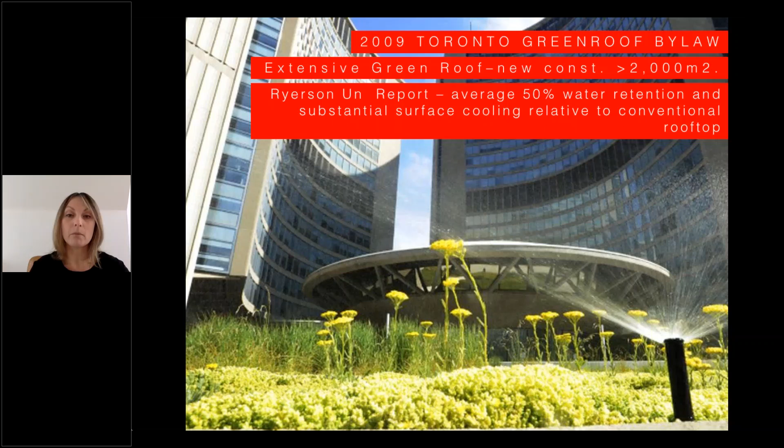And this was based on a Ryerson University report, which demonstrated that an average of 50% water retention and substantial surface cooling would be achieved relative to conventional rooftops. And that was a very monumental achievement for the City of Toronto. Fast forward 10 years, and the City of Toronto boasts over 700 green roofs and well over 5 million square feet of green roof installed.

Around the same time, my colleagues and I at the University of Toronto, a collaboration between the Architecture and Landscape faculty, engineering, biology, and most recently forestry, took on this project to set up an experimental lab to look at the evidence-based research and common industry practices relative to the construction guidelines that were published alongside the Green Roof Bylaw, and from what we learned are the common industry practices in and around Toronto.

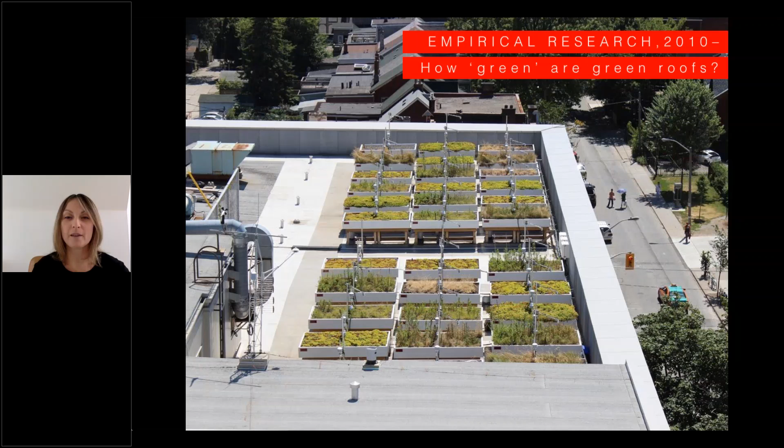And the main question that we asked is, how green are green roofs? How well are we doing in terms of the environmental performance that we ambition? And just for context, the Toronto Green Roof Construction Standard and the Toronto Green Roof Bylaw is part of a much larger suite of policies, strategies, and guidelines

in the Toronto region, which aim for an approach around cross-cutting environmental ambitions, an understanding that ecosystem services, co-benefits of living infrastructure exist at multiple dimensions of environmental management, at multiple scales, from urban forestry down to architectural scales and material scales, street level, and so on.

And that the ambitions that we have around stormwater management relative to reduction of flooding, the increase of biodiversity and species habitat, the reduction of pollution and increase or maintaining of air quality, reduction of urban heat are all interconnected, and that we have to really think about it as multiple systems that are occurring simultaneously and also in concert with one another, and thinking about the impacts regionally and locally.

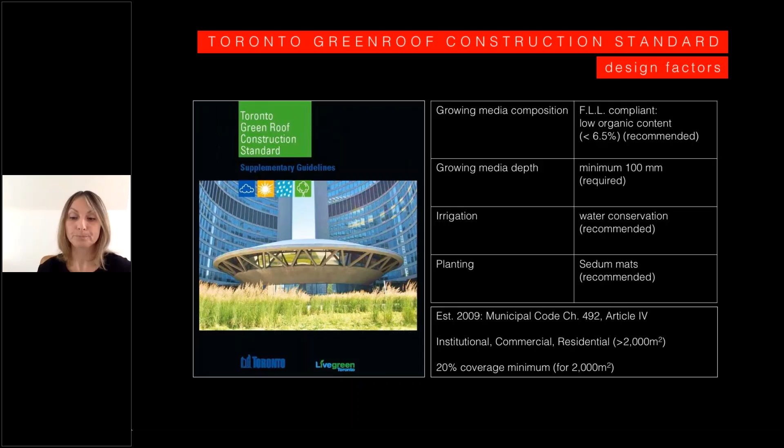So this is an image of our testing lab. On one of our testing labs, we now have two, looking at 33 test beds that examine extensive green roofs between 10 and 15 centimeters. And we're looking at stormwater management. In other words, what is the capacity of the green roof to hold on to water and reduce discharge, or reduce runoff, and alleviate the pressure on urban water systems and flooding.

What's the thermoregulatory capacity of plants and green roofs via evapotranspiration, and also surface cooling relative to blacktop or conventional rooftops? What is the survival rate and plant cover percentage, as well as biodiversity? And what's the relationship of green roofs to pollinators? And as you saw before, there is an ambition for the City of Toronto to become a bee city or increase pollinator habitats. And the main question relative to the design parameters is, what are the most significant design parameters for any one of these performance criteria?

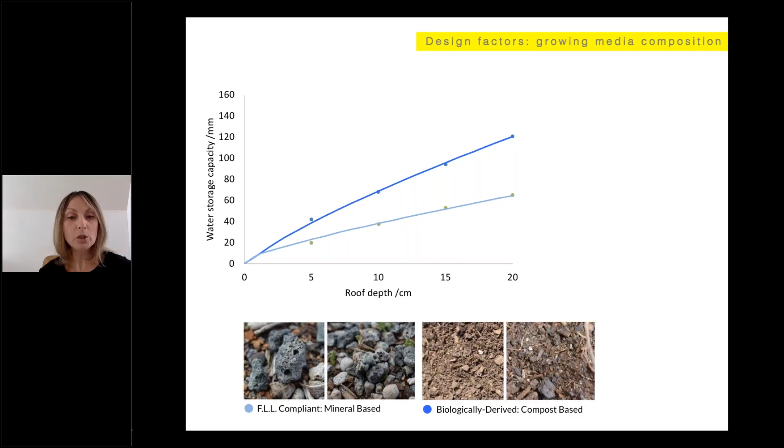What you could see from this graph, and this is just a lab test, looking at the water storage capacity of the FLL in the lighter blue and the biologically derived compost-based in the darker blue, is already showing from the get-go a much larger, higher water retention capacity.

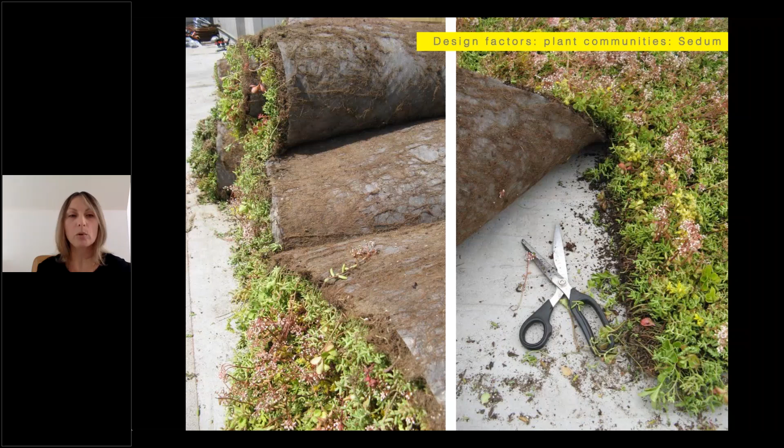The sedum comes in pre-grown mats in nurseries that are rolled and then installed pre-vegetated. One of the reasons that industry and builders like it is that you have a kind of instant landscape at ribbon cutting. One thing that's important to mention is that sedum and sedum cultivars are non-native to Southern Ontario. There are a few cultivars that are native to BC, but even those in the mix are not thriving. So this is something to keep in mind for later in the talk, when I'll talk about the importance of native versus non-native and the relationship to pollinators.

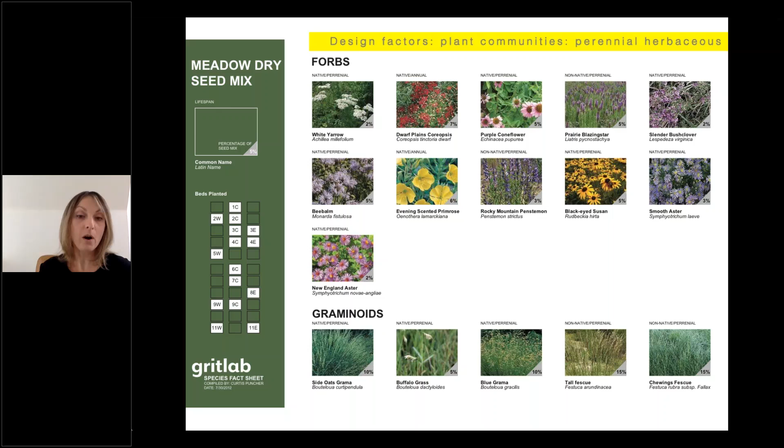The third variable is looking at irrigation treatments. The two common practices relative to irrigation are automated daily irrigation and no irrigation. With respect to no irrigation, one thing that's really important to note is that LEED and green building standards attribute points to non-irrigated landscapes, or at least non-irrigated with potable water. So that's one practice. The other is that green roofs are marketed largely as no-maintenance landscapes, which we'll get to in a bit in a discussion. And of course, there's a cost associated. So you will find many of the green roofs that are installed around Toronto with no irrigation.

The third is something that we took on with the question of what if we installed soil moisture sensor irrigation, insofar that when the soil is wet, the irrigation system would not turn on, and conversely, when the soil is dry, it would trigger the irrigation system, so on-demand irrigation. And what we found was that with the on-demand irrigation, we could achieve up to 50% water conservation, so that's quite significant.

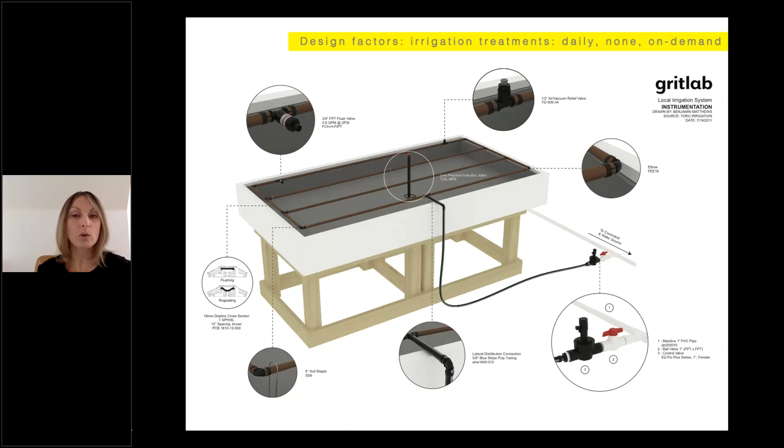So in summary, we've got a multifactorial experimental design, and this is really important to think about because we're talking about ecosystem services. We're looking at multiple performances that we're trying to achieve with a living system. And we're also looking at the fact that there are multiple design variables contributing in sometimes different and opposite ways towards an environmental performance. So here we're looking at, in the right column, the different alternatives. And the fourth element that I didn't address yet is the depth, where we're looking at 10 centimeters or 100 millimeters, which is the minimum requirement for the City of Toronto, and then we're also looking at 15 centimeters.

The question is, if we increase the depth, do we see a difference in the environmental performance? And here, what's really important in terms of depth is that obviously more soil is more cost. More soil or more growing media is more environmental impact. More depth and weight on the roof requires more load-bearing capacity. So again, when you're looking at the entire life cycle cost, the question is, if we increase the media depth, do the environmental benefits we're getting actually outweigh the environmental impact?

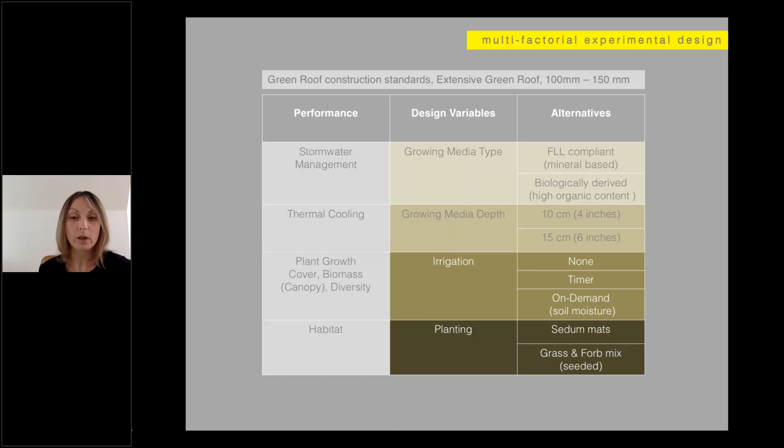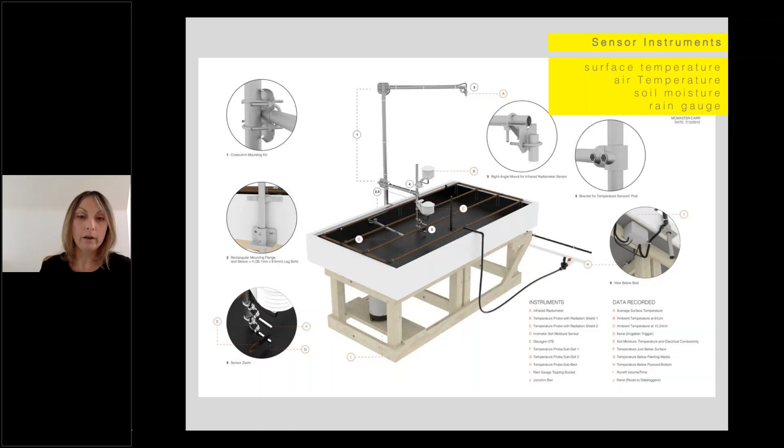All of our lab is instrumented with sensors. We're looking at sensors that are integrated into the bed: surface temperature, air temperature, soil moisture sensors, a rain gauge, which is at the bottom left of the rendering there, looking at water discharge from the bed. And each bed is then measured against a weather station that's recording the climate data on our roof.

So what have we found? As I said before, prevalent industry practices look at the mineral aggregate, the sedum, and either daily or no irrigation, at or less than 10 centimeters. And I'll get to that during our discussion when we're talking about the construction standards or supplementary guidelines from the City of Toronto.

And what we have found, in contrast, is that the organic medium was far superior relative to stormwater management or retention, water retention capacity, also for thermal cooling, and for the support of a much larger range of plants, not only sedum, but also the herbaceous vascular plants.

And of course, the on-demand irrigation proves to be a much better solution than the daily irrigation for water conservation, and a great compromise to sustain a broader biodiverse plant community and increase thermal cooling and reach that kind of balance between water conservation and environmental performance.

A little bit further in detail. So we know, from other studies and reports, that green roofs on average hold on to 50% of the water. And what you're looking at here is runoff coefficient. So percent retention is the reverse. So 0.4 would be 60%. What we found is actually better news. So 60% on average across all the different configurations. So that's really good news in terms of thinking about the viability and the benefits of green roofs.

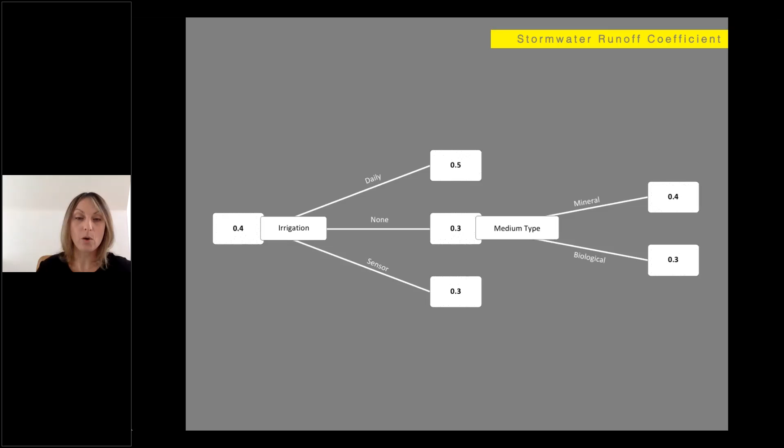And the second most significant factor is the medium type. So the growth media, when we use the mineral aggregate, again drops down to 60%, and with the biological media, we can maintain up to 70% of water retention, which is quite significant, especially if 50% is now kind of the going standard for calculation for engineering.

So in summary, organic media plays a significant role in increasing stormwater retention in modules that do not receive irrigation. Depth or choice of vegetation does not significantly influence the hydrological performance. And that is, I think, a really important message, and I'll discuss that a bit later when we talk about the FLL standards that are dictating a lot of the industry practice in Southern Ontario and in Toronto.

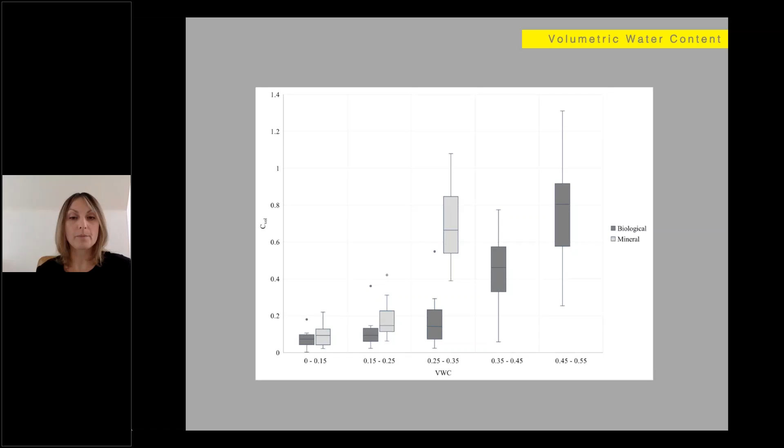What's interesting also about the organic media is that the volumetric water content is far superior between the biological and the mineral. And you can see the biological in the dark gray holds on to the water content at a much greater rate. And what's important to note here is that the organic media water retention capacity increases when pre-wet. And that's really important when we're talking about back-to-back storm events, when the soil is already wet.

The FLL will drain immediately. In contrast, the organic media will just continue to hold on to more water. The pre-wet condition could also be with prior irrigation the day before, and the soil is still wet. So another added bonus for this.

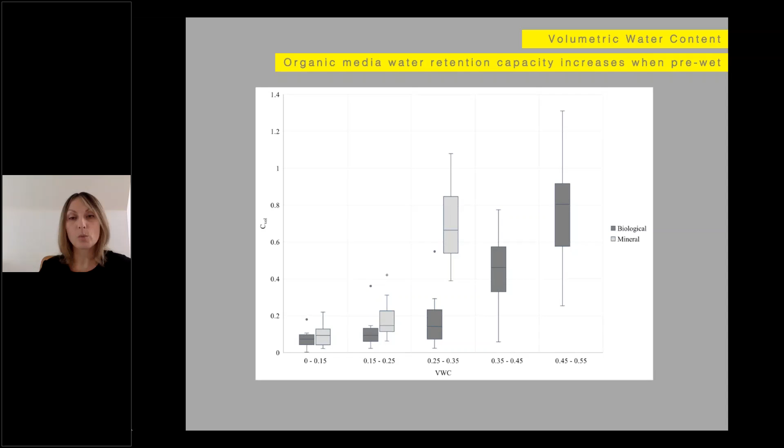And what's also important about this organic media is that the bulk density and the overall weight is much lighter than the FLL. So thinking about the life cycle costs and load bearing capacity, as well as retrofit of buildings that have a limitation in terms of the load bearing capacity, this would be a much better solution compared to the FLL.

This was another study that we ran, and what we found was that obviously, the bottom line is plants, growth media, and water are interrelated. You can't think about plants and water independently, which is one of the biggest challenges in green roof practice. What you can see here from this study is that there is a sharp decline of cover and survivability with what we're calling our meadow or our herbaceous plants when there's no irrigation. So irrigation is absolutely essential for non-sedum planting.

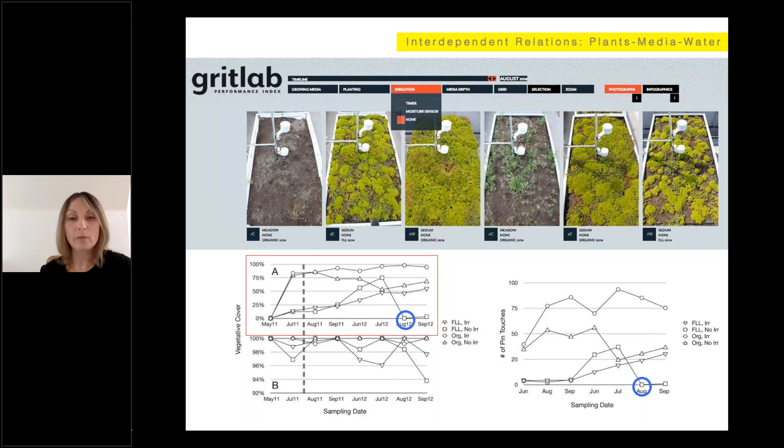The sedum maintains upwards of 90% of cover despite lack of irrigation and regardless of the growth media. However, what you can see here from some of the more patchy sedum beds, for instance, the one on the far right, is that when the sedum over time grows on top of FLL media with no irrigation, it will begin to become patchy and lose cover. And we found that over time.

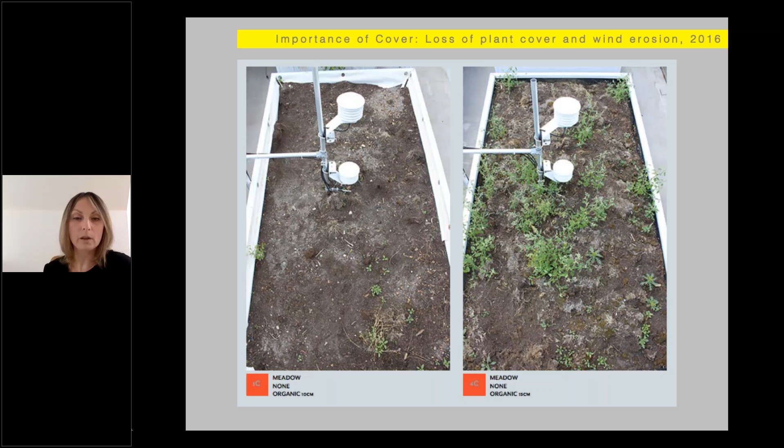And cover is really important. The result of lack of cover is basically scour, wind erosion. You can see how the growth media in the beds over time is lost due to the lack of roots and plants. And that correlates with thermal cooling.

But certainly the combination of sedum on top of organic is far superior, and especially when you're dealing with the herbaceous plants, the organic media and irrigation is essential. And what happens in terms of thermal cooling is that on average, we're looking at surface cooling. So above 6 inches above the beds, the thermal cooling is relatively negligible. It was comparable to what we were recording with the weather station, and this is because of wind.

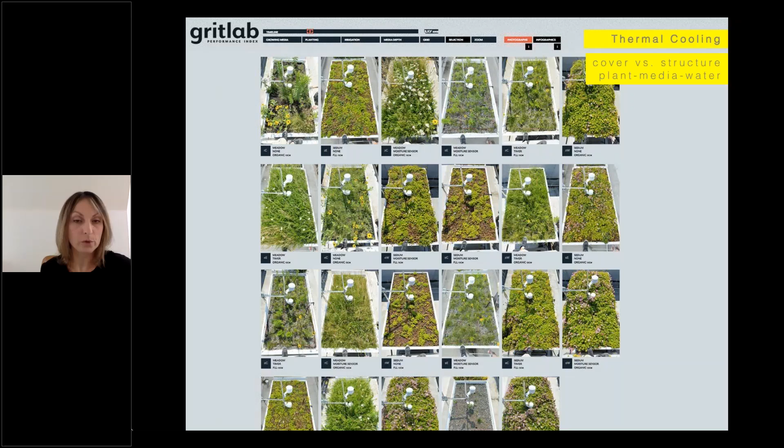Now, I want to talk about where we are in terms of industry practices relative to FLL guidelines, which are the primary guidelines that the City of Toronto references, and the City of Toronto is not the only one. There are many cities across North America that are looking at this FLL guideline, which is generated in Germany. Germany obviously has been a leader in green roofs for a long time. But I want to point out some inconsistencies and food for thought in terms of how we move forward with guidelines and thinking about green roofs, particularly in this region.

First, I think one really important misconception or inconsistency to point out is the difference between the definition of intensive green roofs and extensive green roofs. In Southern Ontario, the idea is that extensive is based on depth. It is 10 to 15 centimeter growth media and construction. And intensive is above that.

And FLL guidelines really talk about this idea of maintenance. So if you look at the text here, they're talking about a type of green roof that can be sustained through intensive care, especially regular water and nutrient supply. And so they're relating the limitations or restrictions around planting perennials, grasses, flower bulbs, summer flowers, and so on, to the idea that it's about maintenance, that it's about intensive care.

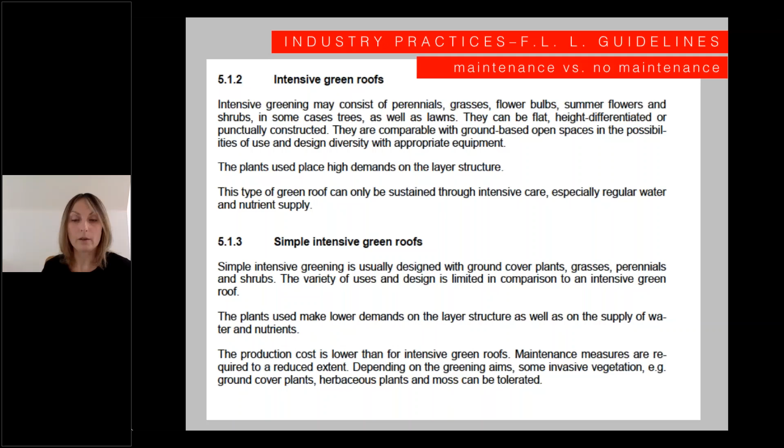In contrast, the idea about the extensive green roof is that it's self-sustaining, it's low maintenance or no maintenance. And you can see here the vegetation are mosses, succulents, and so there is an idea that irrigation is essentially an intensive practice.

And so this is something I want to bring out in terms of the question: should guidelines around green roofs be universal given different climate and eco-regional variations? We have different rainfall between Eastern Canada, Central Canada, and Western Canada. Certainly across North America. Would you compare Toronto to Texas or California or Colorado or Florida for that matter?

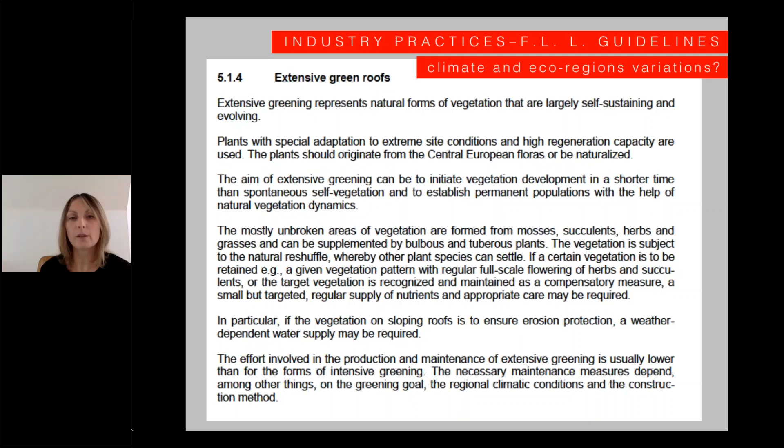How can we take guidelines that are thinking so restrictively, disregarding climate specificity with regards to rainfall, the growth media that's available regionally, and the flora that's available regionally?

The other thing that I want to point out is the linking of growth media depth to water retention. There are references in the FLL around this idea that the only way to increase the water retention capacity is to increase depth. And what I've shown you before is that by rethinking the composition and structure of the growth media, we can increase water retention capacity and nutrient availability to support a much wider variety of vascular plants without increasing the depth.

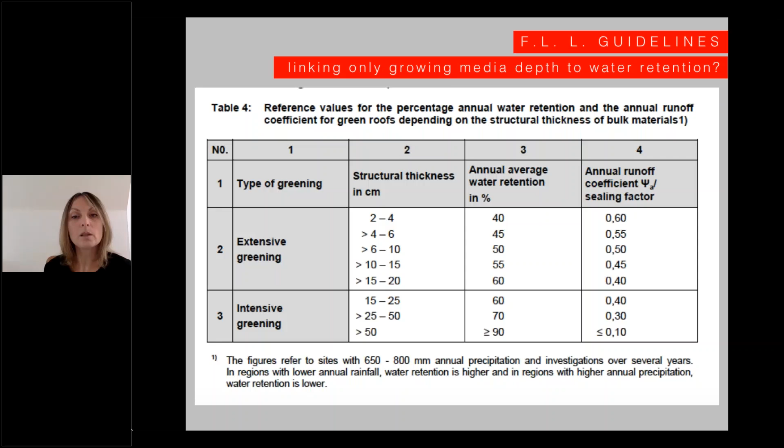And so here's another misconception, I think, about linking only growing media depth to plant selection. In other words, if you are thinking about a thinner construction, you're limited to sedum, and if you're thinking about the more herbaceous greening, you have to increase your depth. And I would argue that it's really about the material composition that we should be looking at, and also the notion of irrigation in concert.

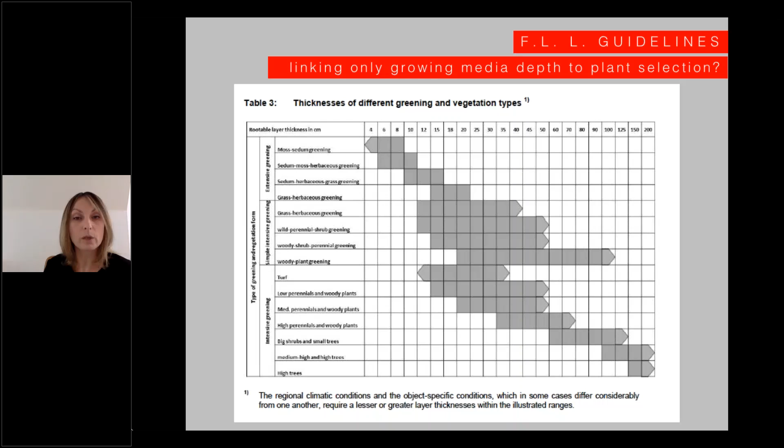Now, organics are vilified quite a bit. FLL is restrictive around organic input, particularly with this idea that in the first year of construction, organics would leach. There's also an ongoing myth around compaction and loss of organics. And what we found in a survey that we did of 20 roofs, some of which are 20 years old in Toronto, was that there was no compaction and loss of organics, and this is due to a natural process of pedogenesis, which is essentially the creation of soil due to the organic matter that is then added to the soil via the plants that are there.

So if you have the right combination and you've thought about what am I growing and what should it be growing in, and does it need water irrigation to maintain cover and full health, you've got an ongoing and healthy process of pedogenesis and soil creation and no loss of organics.

The other myth is about nutrient loading, the nitrogen and phosphorus, which would create eutrophication and algal blooms in our water systems. And we did a quick calculation. If all Toronto's rooftops were covered with organic green roofs, the output of nitrogen and phosphorus to Lake Ontario would be an infinitesimal fraction of the output that's coming out of the wastewater treatment plants. Likewise, we don't vilify fertilizers that are going into our park systems or gardens or any other landscape in the urban environment. So why are we so strict with the presence of organics in green roofs?

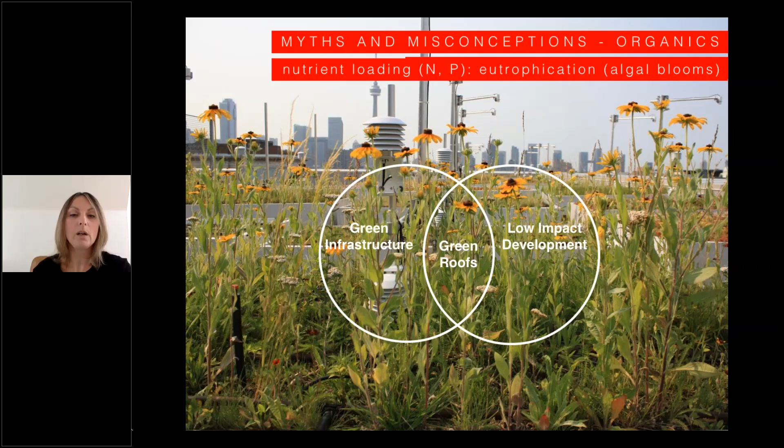And I would argue that part of the logic is that green roofs fall between green infrastructure or living infrastructure, which are these vegetative-based systems, and low impact development, which also includes cisterns and porous pavement that obviously don't output any nutrients into our water systems. And that's where the industry myth around these organics comes from.

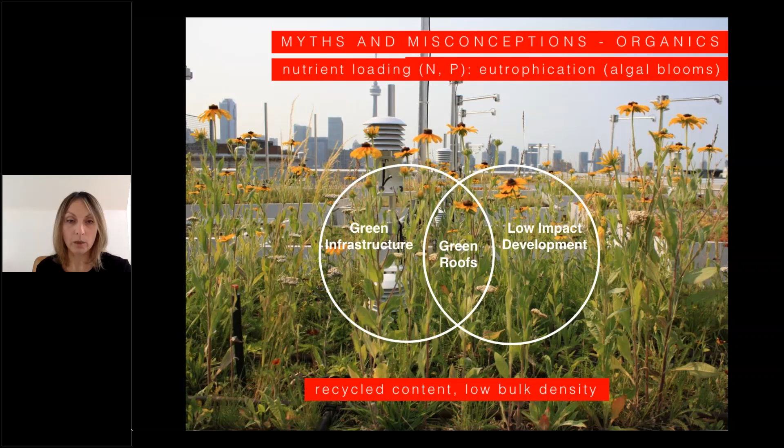And the other thing that I think is worth mentioning is the fact that with the organics, a large portion of them are recycled content. They're coming from waste streams from wood mills, for instance, pine bark, and so on. And as I mentioned before, they also have the low bulk density, and so are much more advantageous in terms of thinking about a full life cycle cost.

And then to sedum or not to sedum, obviously, is the question. This is the primary go-to for a lot of green roof construction, and there are certain studies that have come out trying to prove that herbaceous plants are not sustainable and cannot be grown on a shallow, extensive green roof. And of course, those studies looked at a growth media that was inappropriate to herbaceous plants. So, with every landscape, you're always thinking, what am I growing and what is the appropriate soil or growth media to support that plant?

And why is it important? So we ran a study, which was peer-review published, that looked at the relationship with pollinators and pollen loads relative to the sedum beds on our roof and the herbaceous plants. And what we found was that the native wild solitary bees were attracted primarily to the herbaceous plants. They also visited the sedum plants, but they went to the herbaceous plants as well. And the non-native species, the domesticated honeybee, a European species, gravitated primarily to the sedum.

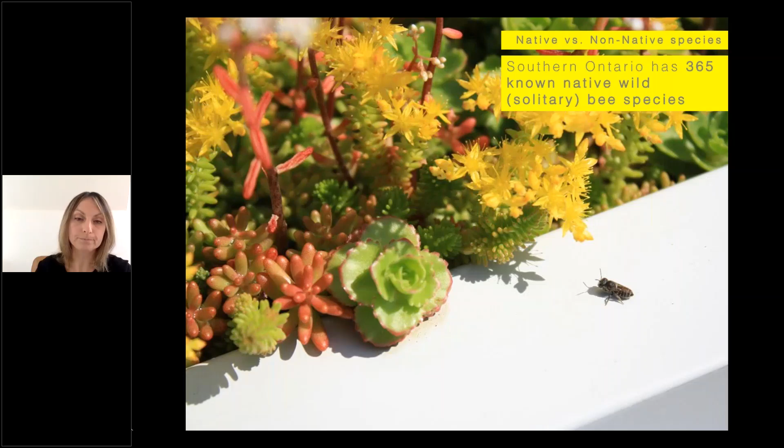More on pollinators, and this was a general study that we did looking at building elevation and green roofs. And does building elevation matter, given that a lot of the construction here in Toronto is 20 stories all the way up to 100 stories? And do pollinators actually visit rooftops that are at such elevation? And what we found was that above the 8th story, there is a sharp decline in bee visitation.

And so the conclusion there is designing for biodiversity at the 60th floor is not really purposeful. And we should think about the city as a 3-dimensional structure, looking at, for instance, the tower over the podium, where the podium is actually designed as a green roof for biodiversity for pollinator species with a much more biodiverse planting.

And the green roof that's installed at the 60th floor is perhaps a sedum mat just to maintain cover, or maybe we just put a white roof, because at that point the green roof is not really contributing much, and all we're looking for is just solar reflectance.

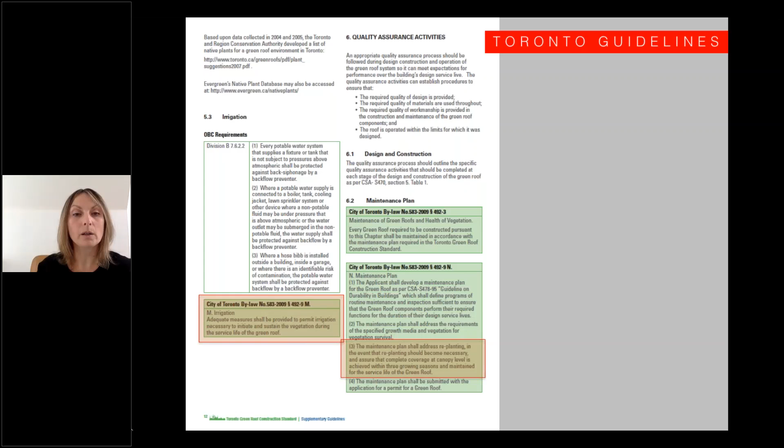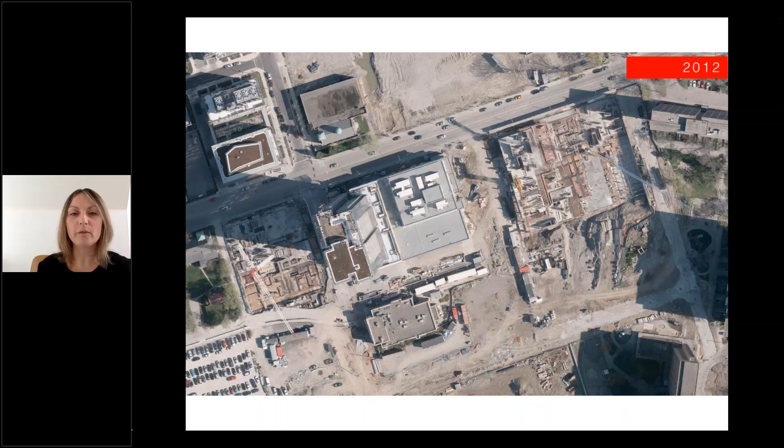So this is what's happening in Toronto. We're now doing a large survey of all the green roofs installed since 2009, and this will take some time, but I hope to report that back to you in a couple of years. But this is what's happening in Toronto.

We've got 2012 sites within 5 years, 10 new green roofs, some of which, as you can see, and obviously this is a winter shot, but still you can see some of the patchiness that begins to occur with some of the green roofs, where you can see some of the white emerging across what's shown as brown, but it's not brown because it's not living. It's just because it's winter. But still, the kind of patchiness is very apparent.

And from our quick calculations, we're looking at least 30, maybe even 50% of that kind of condition of patchiness and degradation that happens over several years. And I want to remind you that we're talking about 5 million square feet of green roofs and rising at the rate of, looking at right now, roughly 1.6 million cubic meters of growth media that was blended, manufactured, mined, transported, and this is the equivalent of the volume of what would fit at the Rogers Center.

So we're talking about a huge environmental impact, and the question is, how do we do better? How do we make sure that this is not just lip service, and that the environmental performance is really up to par with the kind of environmental impact, as we heard from Nicole North's and Daniela's presentations around the impact of mining, aggregate, moving soil, and the larger regional impacts on our environment.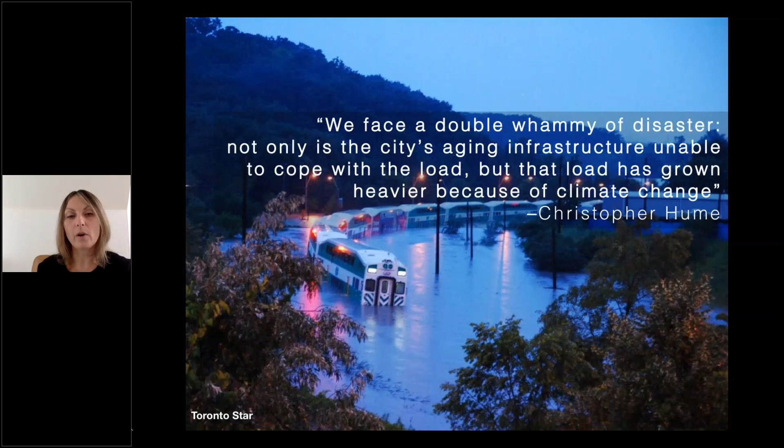And this is also really important in terms of climate change, right? We are seeing these large storm events more and more. And so the idea around optimizing the performance of our green infrastructure is paramount. And of course, we have to remember the co-benefits, the fact that ecosystem services are multiple, the fact that with green infrastructure, we're always aiming to not just do one performance at a time, but multiple objectives. So we're not just retaining water and therefore optimizing just for that, we're also thinking about the biota that we're providing.

So in conclusion, how do we reach maximum ecosystem benefits? How do we minimize environmental impact? I think that we should be asking ourselves the following questions when we enter a project. First of all, what are the environmental performance objectives for the site and why? Are they appropriate to the site? Are they appropriate to the building elevation? What design factors are most significant to achieve the performance or performances?

And how do we maximize the co-benefits and minimize the environmental impact of the materials that are going into our green roofs? And likewise, sustain them over the long term. If the green roof fails after a few years, what have we done? The next step is to really think critically as designers, as installers, rather than to just follow guidelines without actually thinking about whether they're really pertinent.

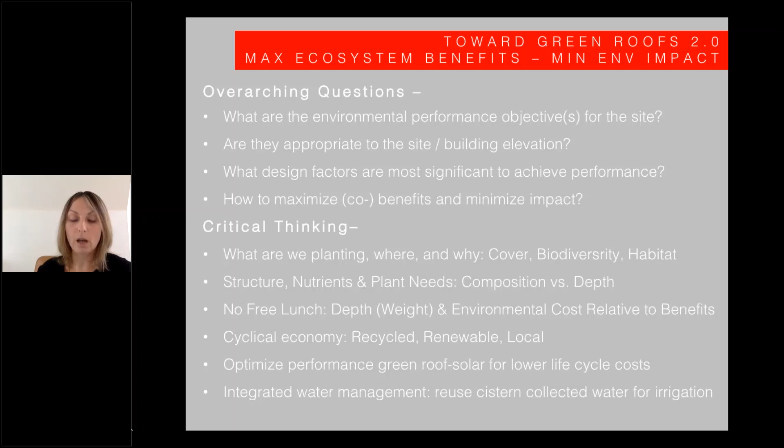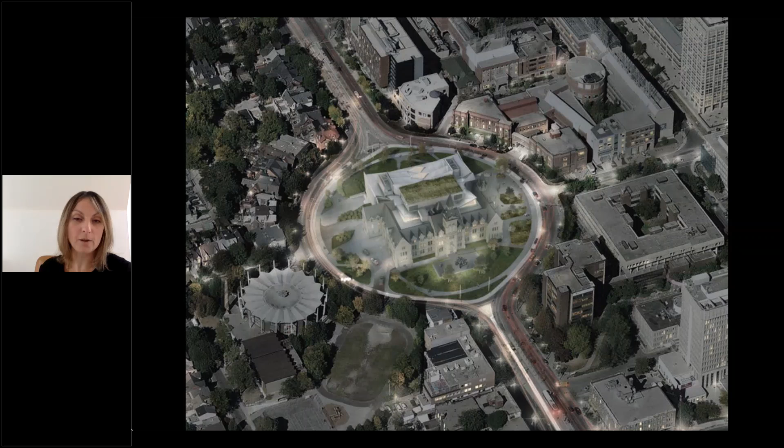And I'll just leave you with a couple of images looking at some of our other studies, which I'll be happy to share at another time, about the benefits of green roof integrated solar and a new project that we recently studied looking at the reuse of cistern collected water from the entire site at One Spadina Crescent, where our Faculty of Architecture, Landscape and Design is located, looking at that for reuse and irrigation on our green roof. And this is it for my talk.